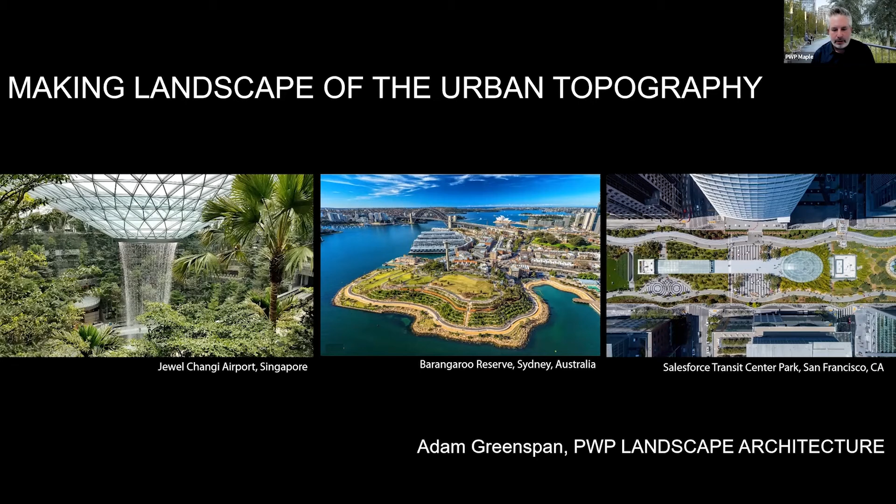I'm a partner at PWP Landscape Architecture in San Francisco, and we do work around the world. What we try to do is make landscape of our urban topographies in cities and semi-rural areas across the country in the US, but also around the world, and these are some of our projects. What we try to do is create places that stick in your memory and establish a shared space and shared identity for the people that live there.

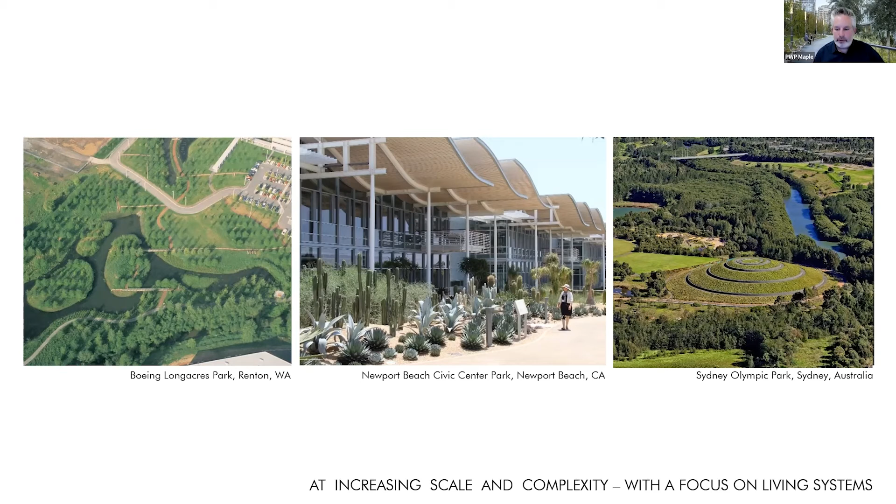And this has been through the last 3 or 4 decades as a firm, but more recently, we've been working at increasing scale and complexity and more with a focus on living systems. What we also challenge ourselves to do is to make great civic landscapes and gardens that last through time by making each of them fitted to their environments and to their cultures.

And this is difficult because we have to learn about the environment and the culture in each of the places where we work. We do that by making places that engage their context using the materials and systems of our world, from the living elements, the animals, the vegetables, as well as the minerals, the social aspects, the ecological aspects, and aspects of time.

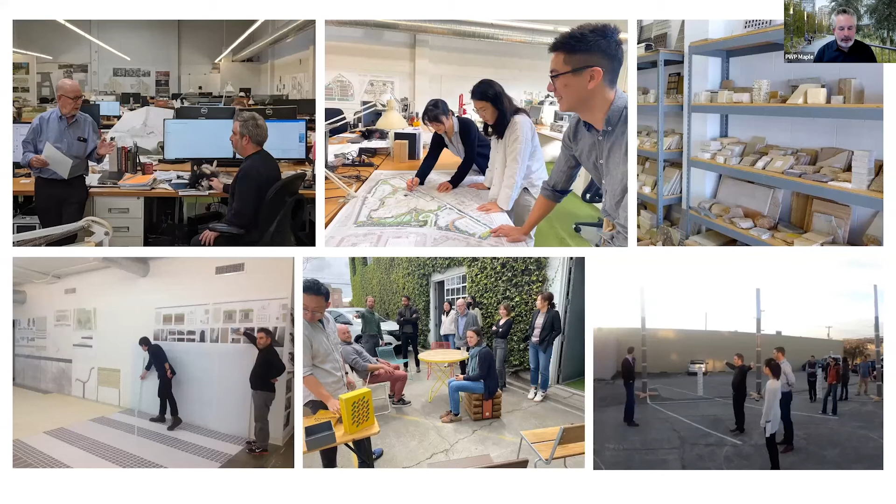And we do that from one studio together collaboratively in Berkeley, California, and this is an image of that place, and also working with actual materials, with spaces, and with different people of different ages. And you can see Peter Walker on the upper left, as well as our canine associate Bootsy on the table.

And I think what we try to do is really think about the landscapes that we make through time. And because Pete's been working for 50 or 60 years in landscape architecture, and we have people of all ages below that, what we're able to do is think about different people's perspectives, different user groups, but also we've all been watching landscapes change and mature over time. And we bring that knowledge of how landscapes change to the work that we do each day.

And so we even did that when we approached Salesforce Park, which is what we'll be talking about today, a living landscape in the sky. Thinking about it as a technological endeavor, a park on a roof, but also an integral part of a new part of San Francisco as it's been developing over the years.

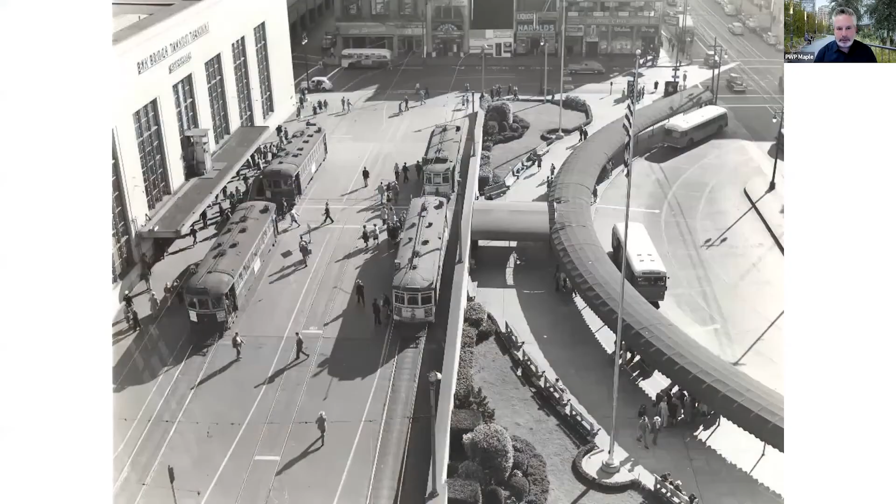So in the 1930s, the transit center and the Transbay Terminal was quite a lively place, with people taking light rail and trains from the station quite regularly. But over time, it became defunct and was really in disrepair in the 21st century. And so the idea of creating a new terminal, one that would be not only the bus depot, but also the future home of high-speed rail in California, was devised, and a design competition was held in 2007.

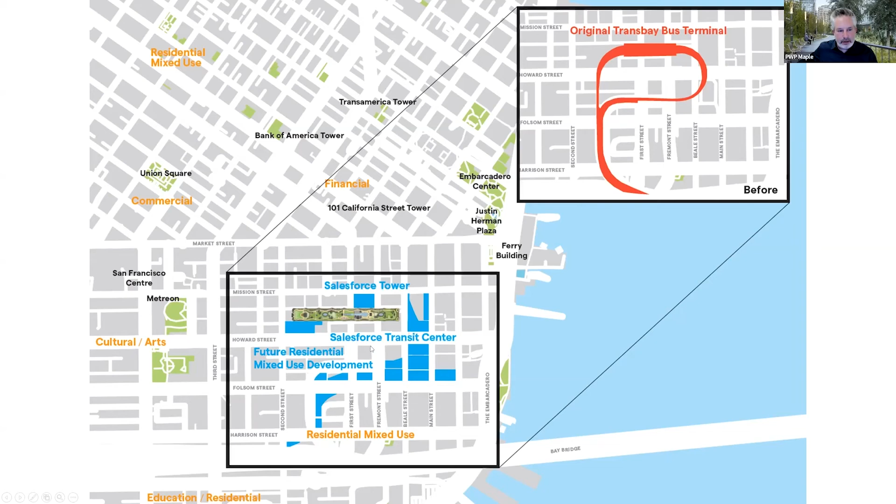That entire concrete ramp was demolished and proposed to be demolished as part of the new concept, so that all of these areas in blue in the lower left could then be developed as real estate sites, because these are the zones where the ramp existed that it would no longer be. And so that set of development sites were intended to be mixed use, residential, office, and retail spaces, so that downtown San Francisco could grow south of Market here and become an entirely new integrated neighborhood.

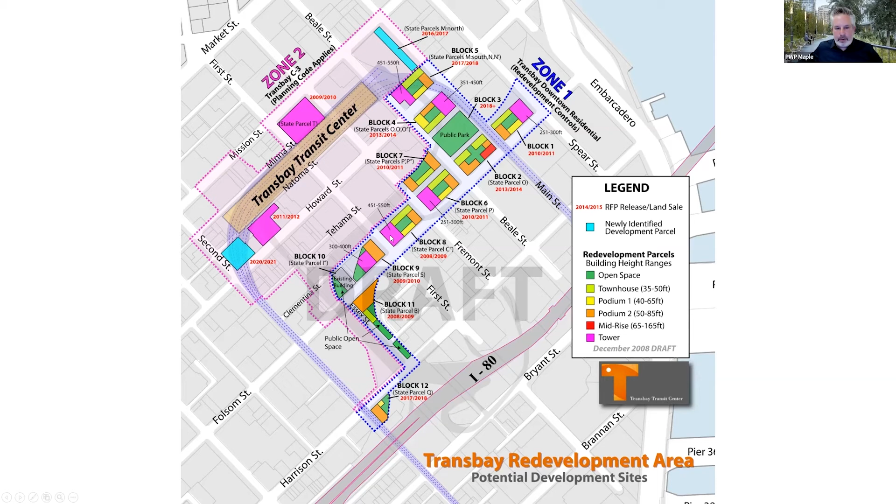And you can see here that the redevelopment area then would comprise all different kinds of uses. This was the planning document from December 2008 that showed how these spaces and areas would be redeveloped. And that had been under planning for years. What's happened there in the Transbay neighborhood is that all of these blue buildings, these high rises, have developed and been built or are in construction right now around the new Salesforce Park site and Salesforce Transit Center site since we began the competition, since 2007.

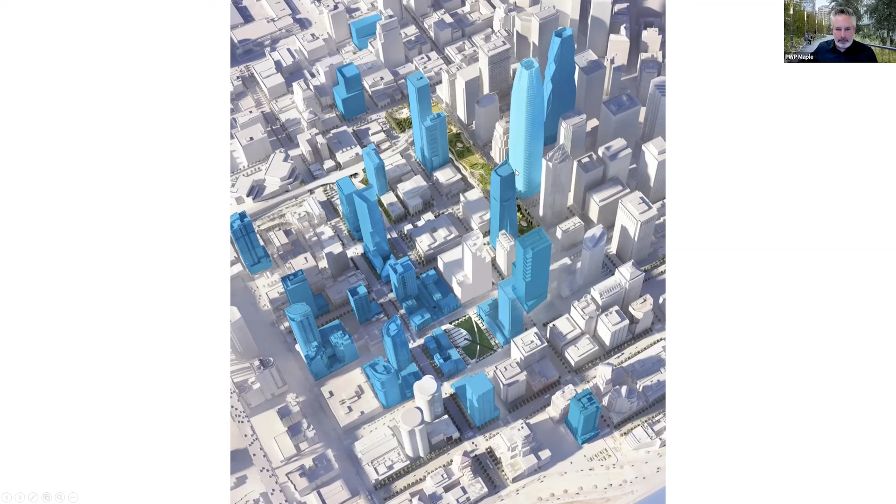And when we began the competition, we and San Francisco authorities thought that this kind of development would take about 20 to 30 years, but all of these buildings came up within about 10 to 12 years. And so the concept that we had in the competition was to make this new transit center more than a transit center, more than a hub of transportation and a bit of city infrastructure, but actually the center of this new high-rise neighborhood by making it a park.

And the reason that we proposed that it could be a rooftop park was because when we looked at the site in the competition early on, we found that that site, this long green rectangle, was bigger than any of the public open spaces that are in the area already. So Union Square, which is above Market Street, which is this diagonal line, is 2.4 acres. Yerba Buena Gardens, which is a few blocks down from the site, was 2.2 acres. And South Park, which is a few more blocks away, was only 0.8 acres.

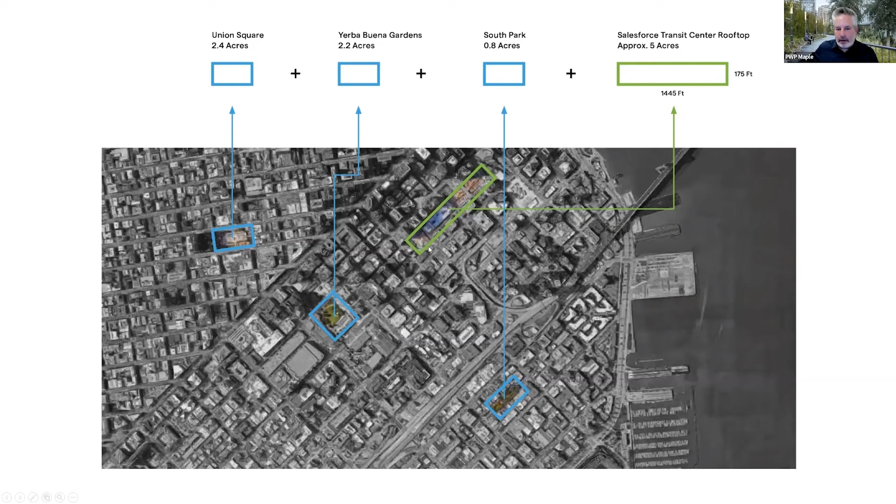And these are all of the green spaces or public plazas, the largest ones that are in the neighborhood. If you added all of those spaces up together, you got the area and the size of our site, which is about 5 acres or 5.5 acres. And for that reason, we proposed making the roof, which in the competition documents was shown like this. This image is a concept drawing that was meant to suggest that the transit center could have a special roof, like a glass roof. We proposed that instead of a glass roof, that roof could be a living roof, one that not only holds and receives and detains stormwater, but that could actually be a fully occupiable, livable space for the neighborhood.

As a design team, we and the architects, Pelli Clarke Pelli and Adamson Architects, as well as the engineers, environmental engineers, Atelier Ten, structural engineers, and civil engineers from Arup and Buro Happold, all worked together to come up with a proposal that we thought would create a building and landscape that together could do things for the neighborhood rather than create a space for a use that would bring the neighborhood down.

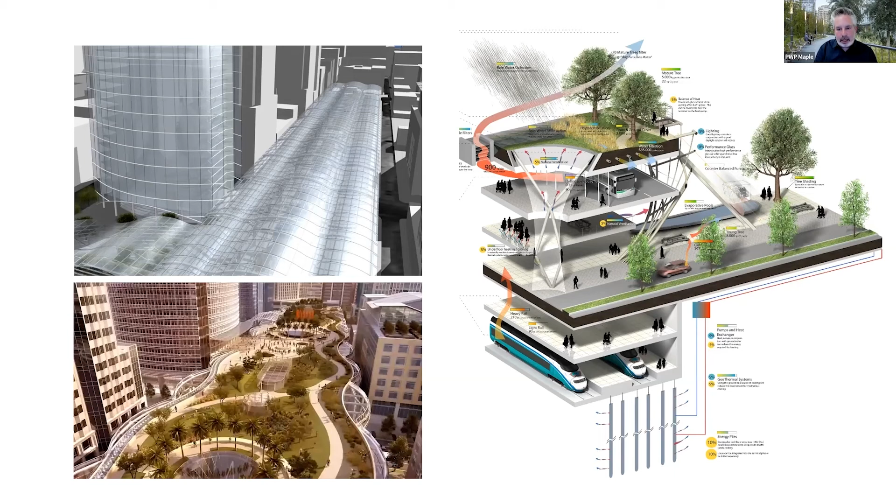And so we aimed to make a landscape on the building that would collect stormwater, that could help cool the building, that could also absorb some of the carbon that was released by the buses and other transit elements that were inside. What we're also building this for and designing this for is to receive high-speed rail, which would be the terminus station, the final station on the route from Southern California, Los Angeles, and Orange County up to San Francisco one day when the high-speed rail line gets built.

And so what we really tried to do was make this new park the center of this new neighborhood. And here you can see that idea of this high-rise neighborhood with tall buildings growing up of a variety of uses. This is a residential tower. This is the Salesforce Tower, which was part of our competition proposal, which is an office building. This is an office building as well as another, and then residential towers here on the south side that you don't see in this image.

And that this new one block wide, four block long, 5.5 acre rooftop park would knit this space together, going over streets that run underneath it. Early on, we knew that developing a park on a roof, 70 feet above the ground, is something that might be difficult to populate.

People might not know that that's a public space up there. And we also were concerned that we might get criticism for developing or proposing a public space above. And so what we also proposed in the competition, and this was an image that was done as part of the competition proposal, was that programming, active programming would be part of the concept of the park, where the park managers would create a program of events and things to engage people that would draw them up there at different times of the day, different days of the week, all through the year.

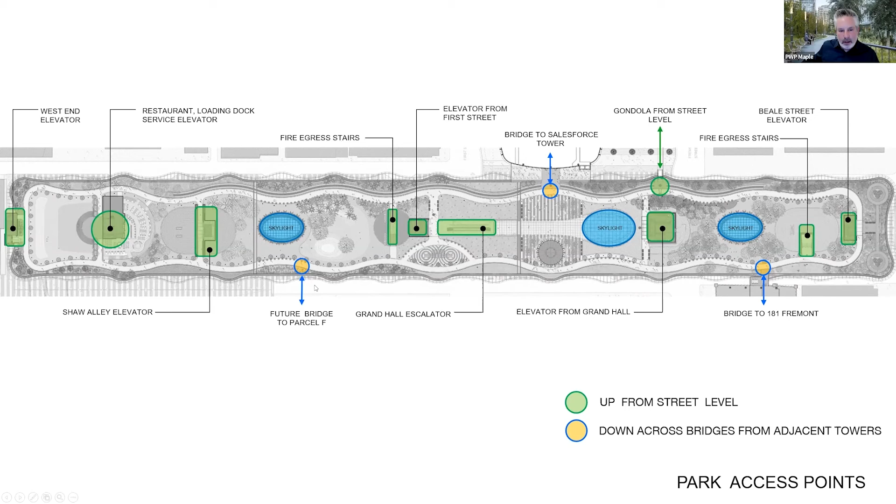That would mean that the 6,000 people in the office here every day above the 5th floor would be able to come down and walk directly out onto the park. We also proposed that there be future connections at future building sites for these new buildings to bridge directly onto the park. And all of those bridge connections have been realized or are in the process of being realized today.

Like I said, when we looked at the reference of Golden Gate Park, that long, skinny format of the park means that it runs through a series of different kinds of spaces and characters along its length. And that was what we modeled here, where the 1 city block wide cross section, which is about 175 feet wide by 1,500 feet long, means that people aren't going to all be in one space.

You can't have a giant concert and have everyone be at the same concert because they're so far away from each other because it's long and skinny. So rather than make it a big gathering space, like a field, we proposed making it a series of different medium-scaled spaces that change along the length. The central space is the main plaza and cafe, which is paved and open for activities and socialization and use, and that connects directly to the tower that's adjacent to it.

And the elevator from the Grand Hall and the escalators from the Grand Hall come up to both sides. So that's the sort of social center of the park, with additional more populated areas and less populated areas running out from there, with a picnic meadow, a big lawn moving further to the west, and then more passive spaces, a restaurant within the park, and then an amphitheater space at the far western end. While there's other ecological gardens, and then a wetland garden that was designed to treat gray water from the building at the far eastern end.

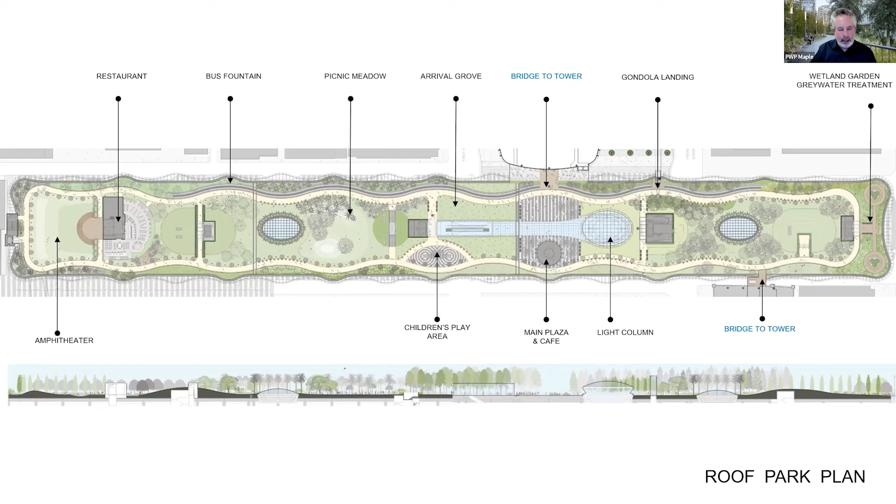And so the topography and the rolling hills of our design are able to roll over some of the elevator head houses, some of the staircase pop-ups, so that instead of looking like a roof with a lot of architectural elements that pop up above, it looks like a landscape that has an undulation to it, and you don't see all of these mechanical or architectural pop-ups like you would if it were a flat design.

And so here you can see from our design process, all of those elements popping up above the flat deck if we would have made this a flat park, and then how the rolling hills cover over some of those things on the right side of this image.

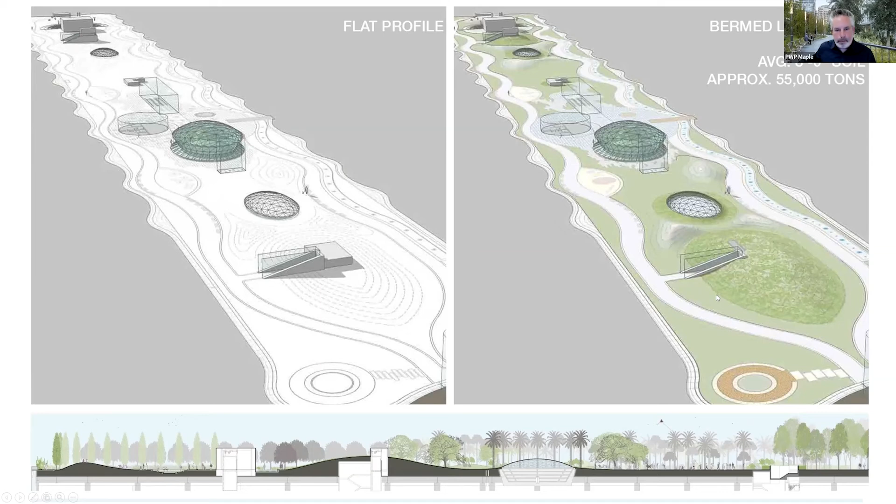The rolling hills and the overall landscape design was also conceived as a living landscape meant to support trees and shrubs, animals and plants for many decades into the future. And so to do that, we wanted to maximize the amount of soil, the volume of soil, and ensure positive drainage, but also balance the weight related to the technical constraints of the structure.

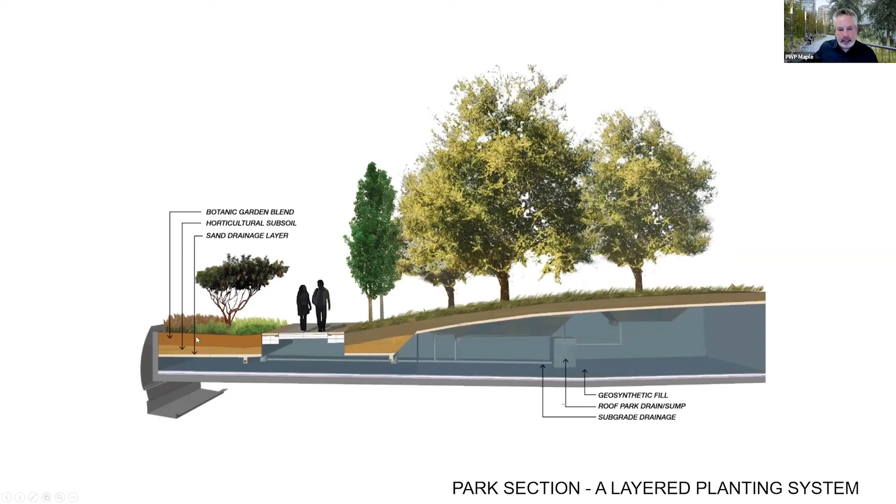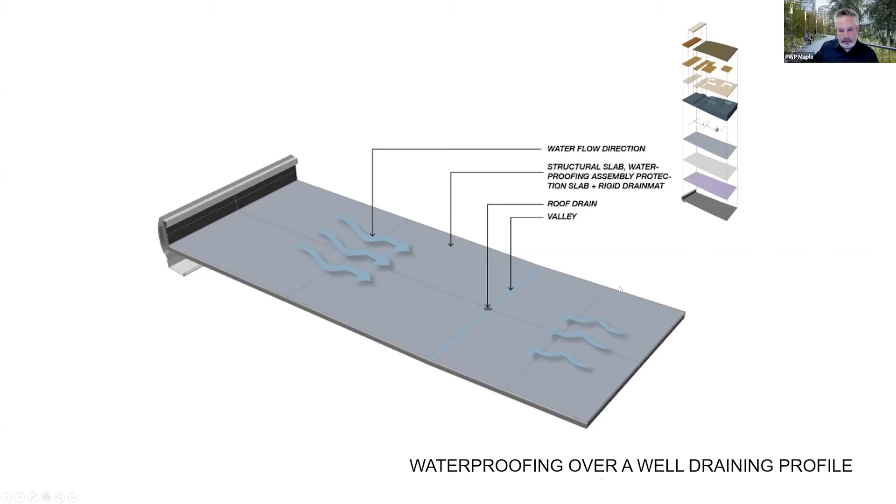To do that, we developed this cross-section, which I'll describe a little bit, which is showing that there's connected soil that runs the length of the park, so that all of the trees are able to interknit their roots while also maintaining drainage. At the bottom of that section is the tray that holds up the entire park. It's about 4.5 or 5 feet below the main park level, and it's sloped to drain along 2 lines that run the length of the park.

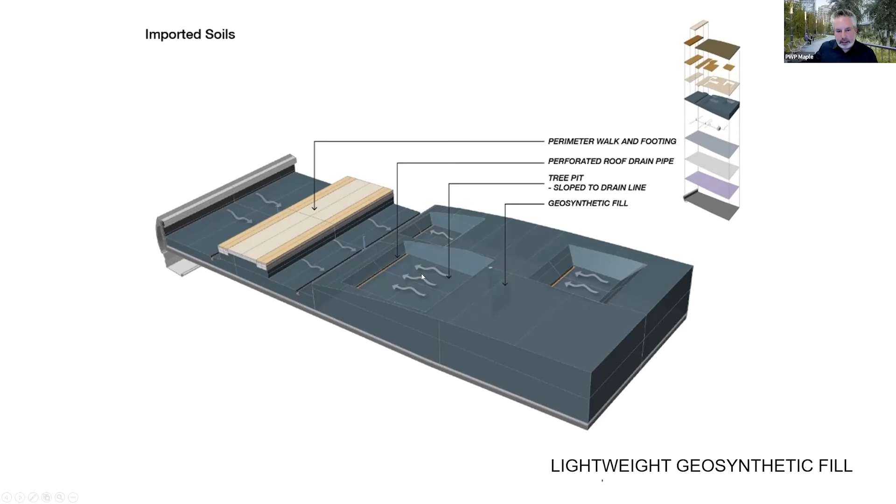Above that, we built up areas to contain the walkways and areas to receive large trees initially, and also use geosynthetic fill or styrofoam to fill in areas between the deep spaces where the larger root balls needed to be set with the trees. And on top of that, we have contiguous and continuous soil that connects together across the entire park. And you can see that in those 2 layers.

And so there's deeper areas around the trees, not because the trees need 4.5 feet of depth or 5 feet of depth, but because when they're grown off-site in nurseries here in California, they're grown in deep boxes. In a forest, the trees really grow and their roots grow in about 2 to 3 feet or up to 1 meter or less of soil in depth, but they grow very wide. When they're grown in a nursery in California, since they're grown in boxes, they make those boxes deeper to give these trees more soil depth. I mean, not soil depth, but more volume.

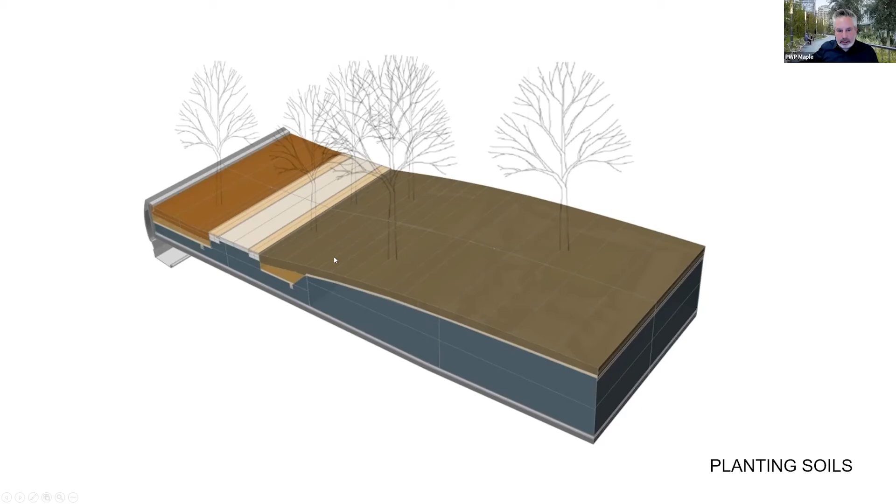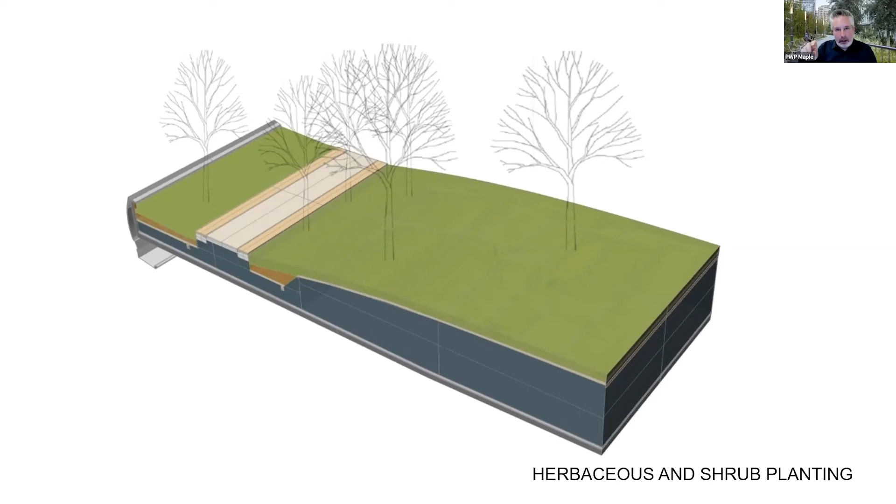And so to accommodate the trees that we were able to buy in California, we made deeper spaces, but then allowed and created ways to connect those roots and allow them larger soil volumes by creating a connected soil matrix across the entire park. And then planting the understory plants, the other vegetation above that. So across the entire park, we have about 3 feet average of soil, but that depth varies from 4.5 or 5 feet, like I said, to 1.5 feet in the shallowest areas where we're planting lawn or ground cover or perennials.

But like I also said, all of this is connected so tree roots can spread across the extents. So what you see here are the diagrams that relate to the park that we've developed. A topographical landscape with flat areas at the center around the plaza and the picnic meadow, with more topographical and rolling spaces in the mounded landscapes at either end.

What that means in the second image is that places for active recreation, performances, gathering, games on the lawn, light sports and recreation all happen in the flatter spaces. Whereas reading a book, listening to music in the park on your headphones, walking through landscape areas and gardens happens in these blue areas at the two ends.

And then at the far western end, we have the amphitheater, which can be programmed both for performances, but also because it's a rather flat lawn space, it can also and has been used for exercise and for recreational activities there.

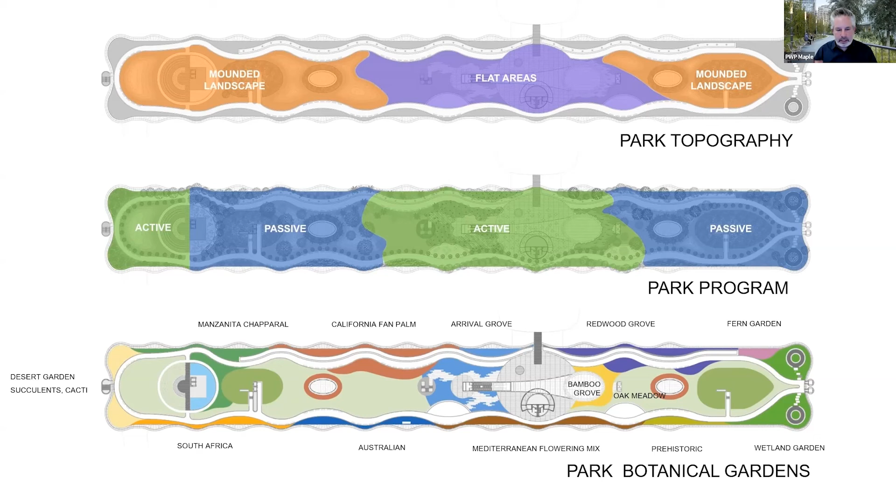One of the other main goals, connecting again back to the idea of plant collections and the Victorian history of San Francisco, was that we wanted this to be sort of a mini botanical garden in the center of the city that would be easily accessible for anyone in the area, so that the general public might be more exposed to a variety of different kinds of plants and the wonders of nature. And what we proposed was that this botanical garden would be specifically focused on plants that are acclimated to San Francisco and Northern California, but also the specific climate of the roof, and the urban environment that we're in.

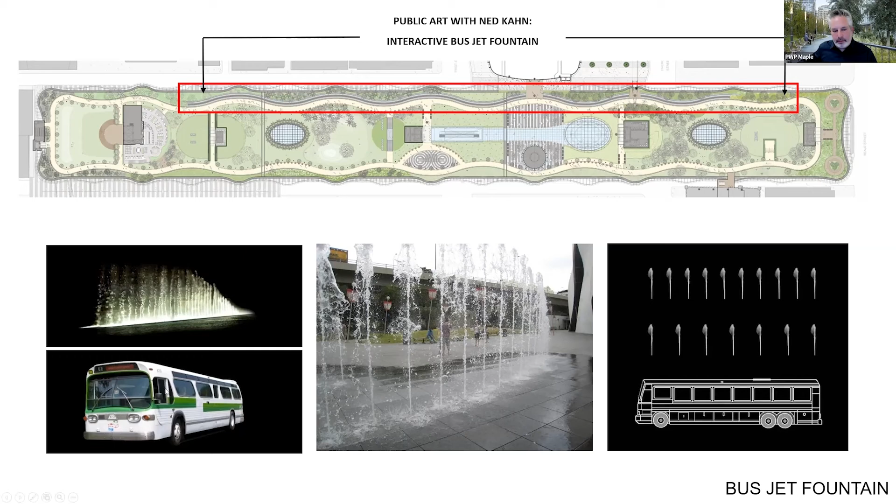We also worked with Ned Kahn, an environmental artist, in the competition to develop an integrated concept for an environmental art piece. And he proposed what he called the bus jet fountain, which was intended to be a series of jets that were triggered by the buses moving on the bus deck level below the park. It was designed so that, like in an old gas station where you drive over a pneumatic tube and it makes a bell ding, the buses would drive over a pipe which would shoot a jet of water up on the park above. And so the buses would then be registered in their movement at the park level.

Ultimately, we developed this with him so that they don't drive over this pipe, because that wouldn't last for decades, but instead there are sensors in the roof of the bus deck level that sense the buses as they move through from above. And we have them spaced at about 4 or 5 feet each across the roof. So as the bus moves, it triggers about 8 to 10 of these at one time.

So 8 to 10 jets shoot off at the speed that buses move down the length of the bus deck. So people at the park level see the movement of the buses, and they see this line of water jets run down the quarter-mile length of the park. Kids can chase these, parents can walk or chase them too, and we've been seeing that happening all the time now.

What we also proposed was that while the center of the park is conceived as the social side of the park, the place where people arrive, where they spend their time, we also looked at the outer edge of the park as a sort of botanical habitat edge. And on the top, this image was one of the competition images that was used as part of our submission, where we imagined that that dark green edge in the diagram below could be something rich with all variety of plants, focused both on the special feature gardens that we were designing, but also on creating habitat for the flying members of the San Francisco community.

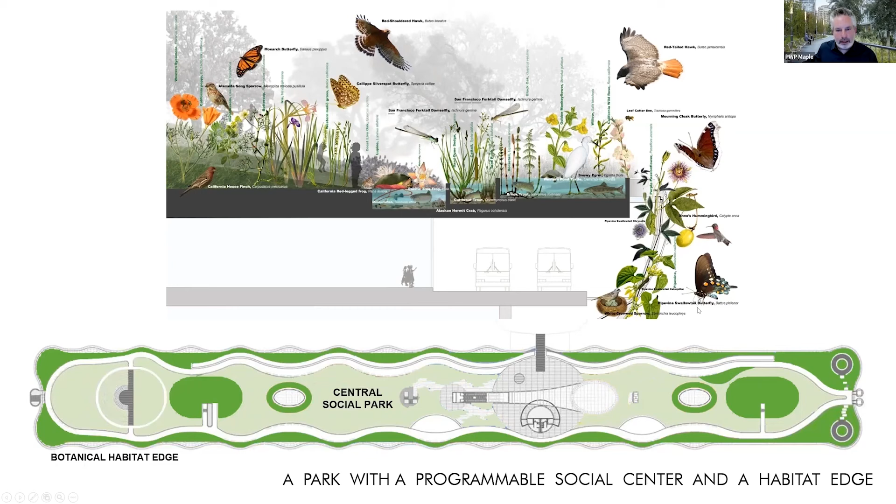Around the outer edge, we focused on feature gardens with plants that are specifically suited to our climate, with a really large California garden on the northern side, as well as a desert garden at the far western end, a South African garden, an Australian garden, a Mediterranean garden, as well as gardens focused on specific types of plants, a prehistoric garden related to plants that grew in the time of the dinosaurs, and a wetland garden, plants that grow in wet soil, designed to be in a constructed wetland that could also treat the gray water that comes from the building.

This is the gray water wetland garden, a garden that was designed as a subsurface wetland where water from the restrooms in the transit center below is pumped up and polished below the surface within the gravel of the substrate. That water is polished in that substrate and then drained and held in a cistern below where it can be reused in the toilets and urinals of the bathrooms within the building.

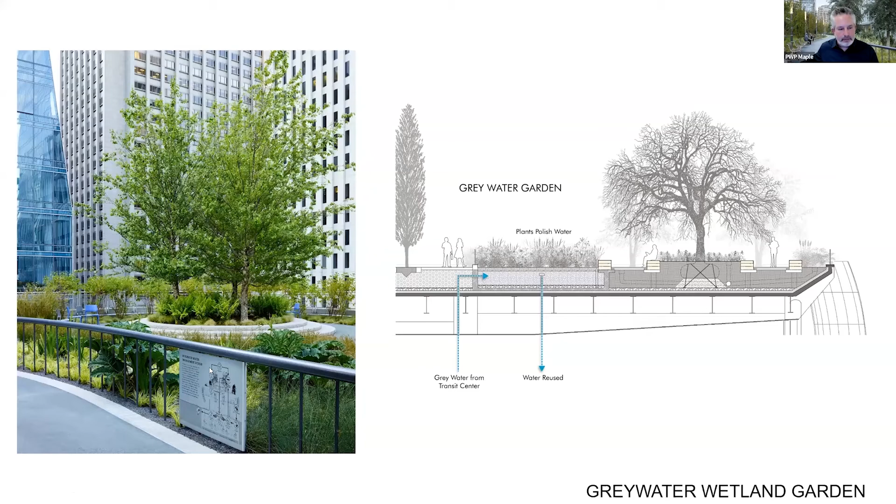And this was all described here in another interpretational sign describing that cycle of water within the building and within the garden. And while you don't see water here, what you really do see are plants that thrive in water and that feel like they're growing around water.

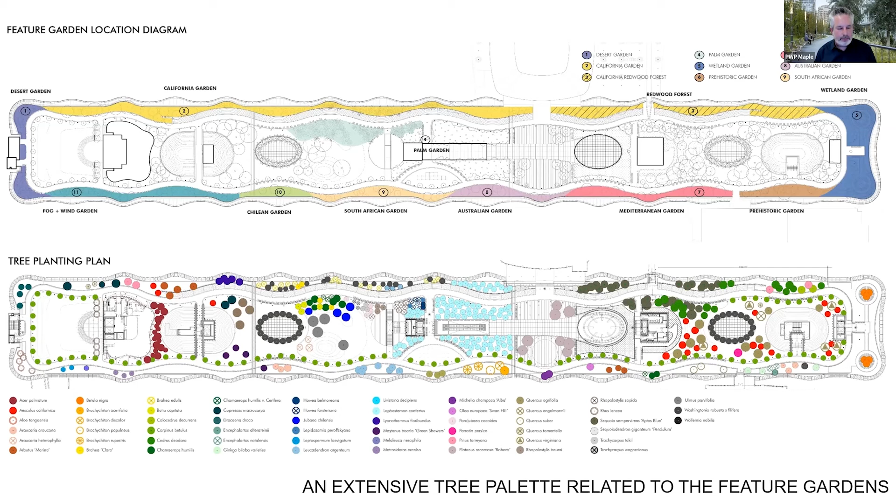And what we've also heard is people talking about all the different plants that they see as they move around. And what we wanted to do was make gardens that really highlighted different moments in time so that there would always be something for people to be surprised by when they come at different times of the year.

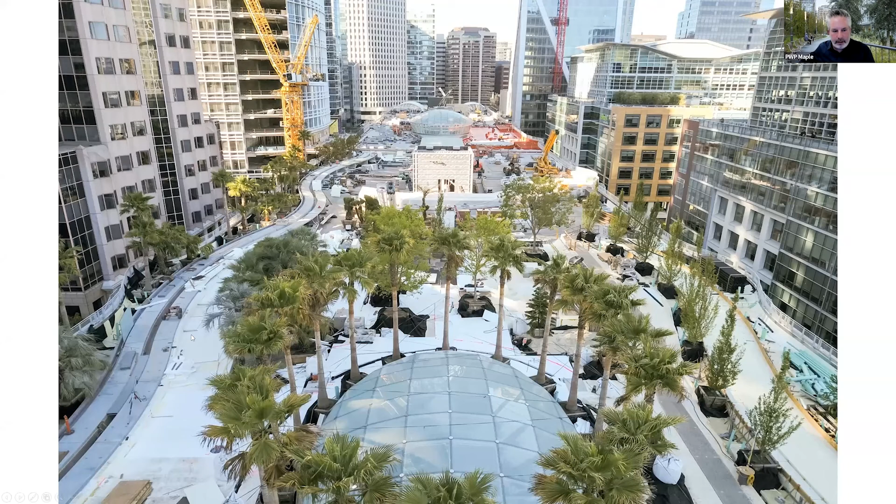Here you can see an image from during construction of the buildup taking place. In white is the geofoam, the styrofoam that is the lightweight fill that's held below much of the soil. And you can see the trees being set in those larger pits within the foam spaces.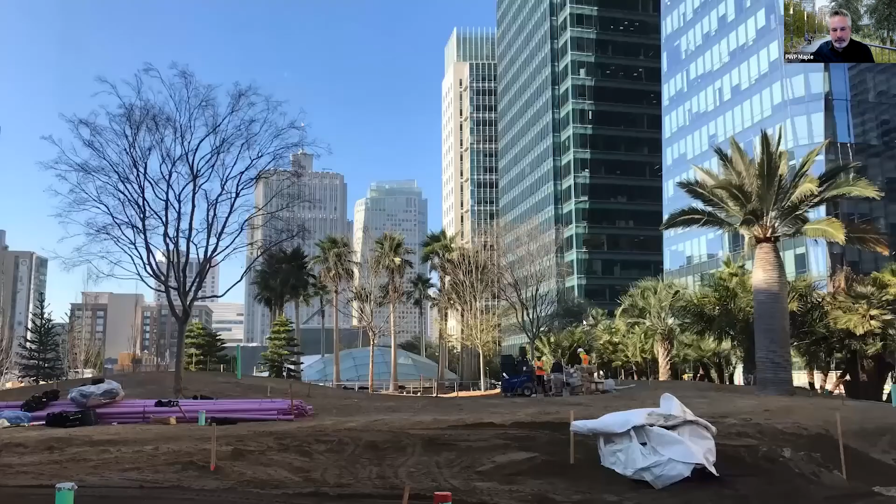This image shows the same area from the other side, looking back after the top layers of soil have been installed. And so this is at the picnic meadow, or the future picnic meadow, with the palm garden on the right, the ring of palms around the skylight to the bus deck level in the middle, and one of the rolling hills in the lawn on the left.

This is an image above the plaza with gathering happening, and the skylight, the light column on the right side that runs down to the Grand Hall, with a flush skylight that allows natural light over the escalators that pick people up in the Grand Hall and go up through every level to the left and let people out here on the far left of the image, which is at the children's garden, the play area to the south, and the bus jet fountain you can see running along to the north.

The skylights are flush and actually act as paving within the center of the stone paved plaza. So within that plaza, we have cobblestone paving and glass paving. The glass paving means that people's shadows project below, and you can see them from the Grand Hall below.

This is an image of the half-mile loop walk that runs around the park with the plant rail and benches set in. In the mornings, people jog on this path, as in the evenings. Throughout the day, people spend time walking and having walking meetings. And this is a calm family watching the water rather than running after the bus jet fountain and the buses as they move down the park.

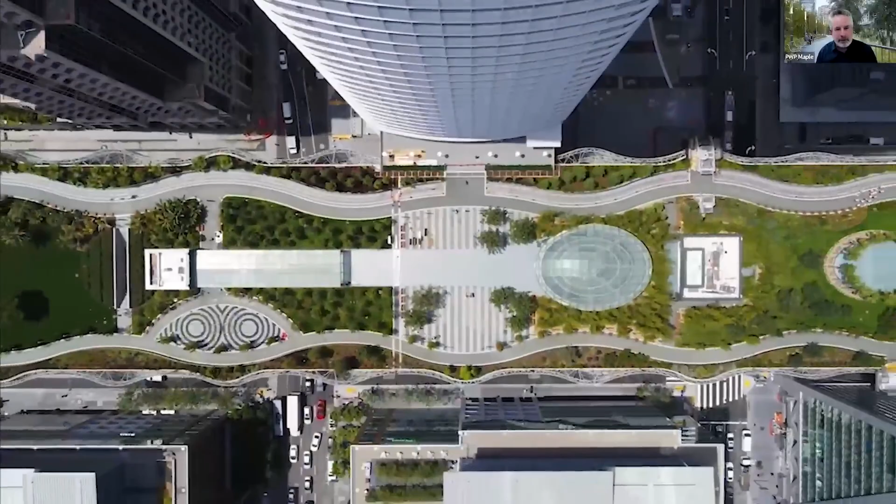So I think that brings us to the end of this presentation of our rooftop park. Like I said, we work all over the world, but this has been incredibly special to be working so long on a place that's right in our own backyard, front yard. Being able to be part of the growth of the city and design and install a place that will continue to change over the years and over the decades, but hopefully become and stay someplace that's loved and used by the people of San Francisco means a lot to me, but also to everyone in our office. It's a place that we're happy to keep checking in on, and also thinking about as we move to other places and other designs.